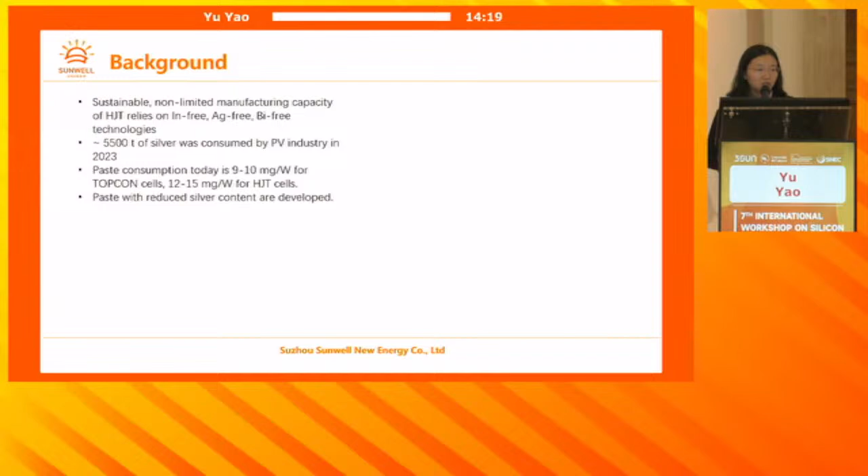I'm going to present our work at Sunwell, done jointly with Tongwei Solar, on copper plating for heterojunction solar cells. Last year in the same workshop organized by Huasun, we presented that for sustainable, non-limited manufacturing capacity of heterojunction, we need to achieve silver-free, indium-free, and bismuth-free schemes.

Today we are able to say that we have a solution ready, industrial scale, for silver-free. You can see from this Bloomberg survey that there are 5,500 tons of silver used by the PV industry last year. Last year they were also claiming that for different technologies, this amount of silver is needed. And we see from last year till now, the industry has done a lot of work to reduce that.

Nowadays it's 9 to 10 milligrams per watt for TOPCon and 12 to 15 milligrams per watt for heterojunction cells. These are in terms of paste. And we know that there are pastes with reduced silver content, so we are doing better than the figures in the Bloomberg report.

However, with low silver content metallization, it's typically like this silver-coated copper paste with ball-shaped copper particles, 1 to 4 microns in diameter, and a 50 to 100 nanometer thick coating.

We know from the literature that when putting a stack of silver and tin on top of copper, both tin and copper will diffuse towards the silver, and especially the copper diffuses through the grain boundary of the silver and leaves behind voids.

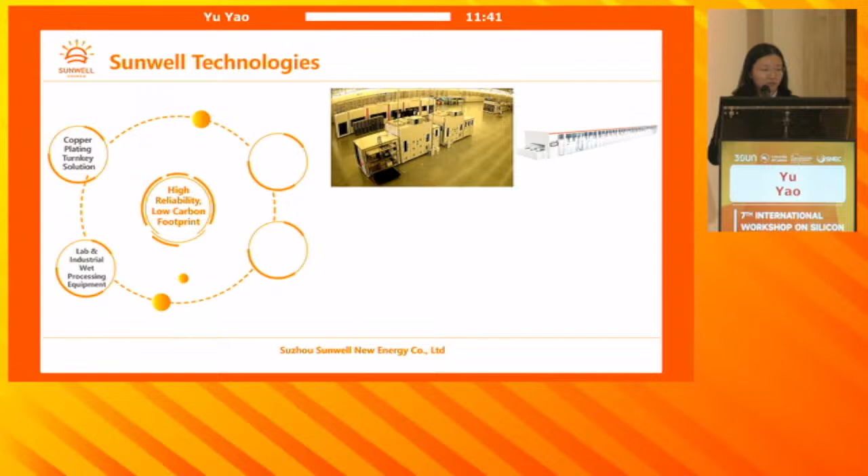We have also had some delivery of multi-gigawatt scale TOPCon wet processing equipment. It's on the customer side in production.

For the copper turnkey solution, we have developed some of the necessary materials, resists, and chemical additives by ourselves. We also have a small portion of our business in BIPV tiles.

Some of you might be familiar with this location, a picture I took in Neuchâtel a few days ago. This is the building where I believe many people working for Roth & Rau, Meyer Burger, and CSEM have done their PhD, and we are proud to say the roof of the building is now 100% covered by Sunwell tiles.

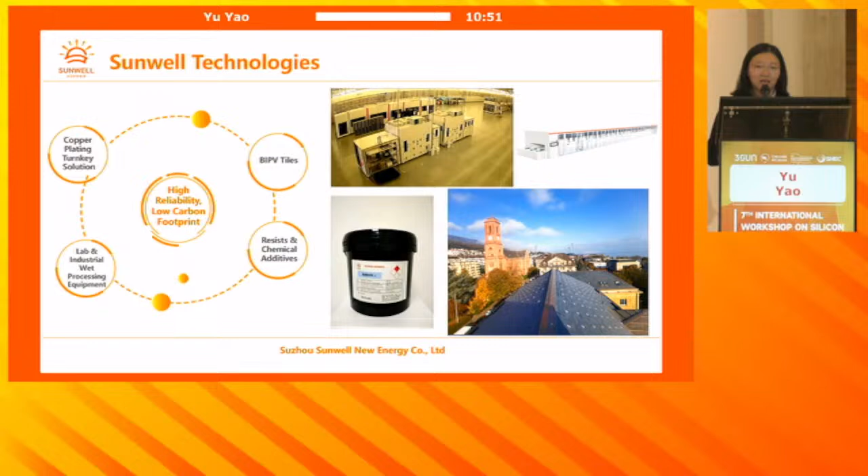Going back to the copper plating turnkey solution for heterojunction cells, our process starts with the seed layer on both sides.

We have developed the equipment, process, and materials necessary for coating the seed layer on both sides, and doing light exposure to separate where the openings and masks should be, with a wet chemistry inline machine for making the openings, and edge protection equipment and material to protect the edges. Then we do the plating and finish with resist removal, etch back, and surface finish.

So for the pattern definition, we actually released the first lab version tool in 2021. It's based on laser direct imaging technique. Basically there's a DMD chip that flips on and off and defines where the openings should be, where the pattern, where the mask area should be.

So it's fast in implementing new metallization patterns. You can basically draw a CAD and put it in the software, and the chip will do the job. But it's limited with a printing speed up to 160 millimeters a second, and it's using laser, so it's 405 nanometer wavelength.

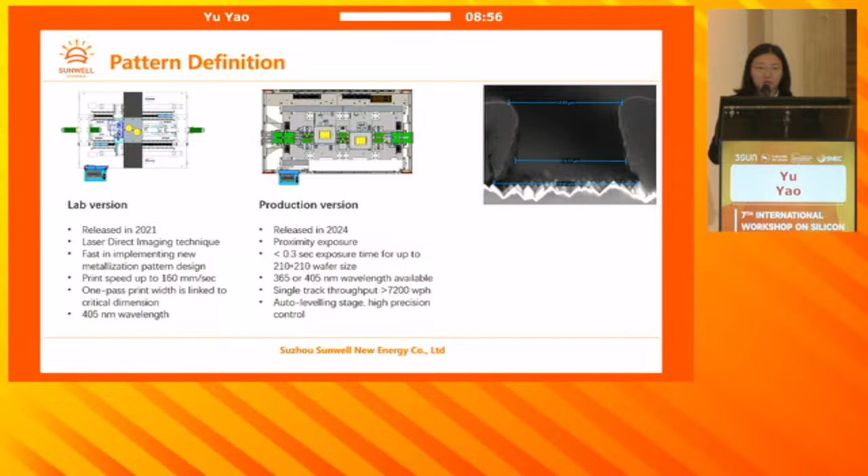For the edge protection, it's necessary to achieve good reliability, because basically all the conductive surfaces in contact with electrolyte, if it's not meant to be your metallization patterned area, should be protected. It also helps to keep moisture, metal, and other ions away from leaking into thin films and silicon substrates. So the edges and surfaces have to be protected.

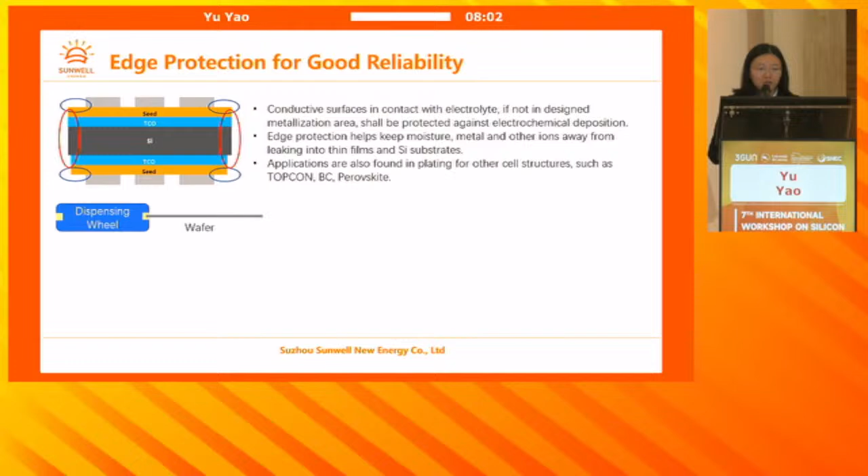Our method is basically we have this dispensing wheel, and the liquid resist goes from the center, dispenses to the edges. The dispensing wheel, any part of it, will never touch the wafer. It's only the resist material touching the wafer.

The resist can be heat cured or UV cured. We have both types of resists available, and the viscosity can be in the range of 200 to 10,000 CPS.

And this actually found applications not only for heterojunction cell plating, but also for TOPCon, back contact, and perovskite. For TOPCon, which was a bit of a surprise to us, when people were doing larger batches and had to involve cassettes in transferring the wafers, they realized that in some cases the edges of the TOPCon cells can clash with the cassettes, and that's where exposed conductive surfaces can be.

So actually, it's also necessary to protect the edges. Our method, you can see at the left, which is quite an extreme case, because this wafer is laser scribed and snapped, so the edge is not regular at all, and we can still protect the edge without cracking the wafer.

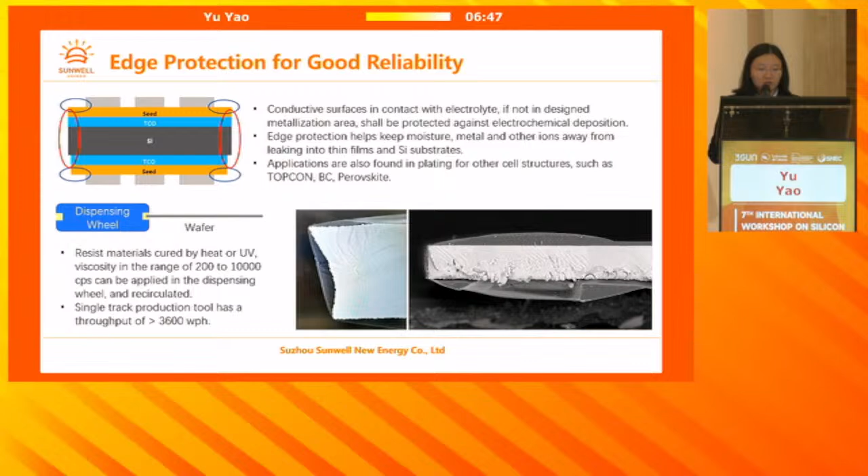So plating for good reliability, in our point of view, has 2 key questions. First is how to make good electrical contact to wafers. It needs to have a tight electrical contact to make sure that it's ohmic contact, but it also has to be soft in a sense that it doesn't damage the pyramids.

We presented also last year that with a hard contact, like small pins, even with 0.3 Newton of force, you will find some tips of the pyramids being damaged. The risk is that usually these are the areas where there's plated metal, so it's not active under electroluminescence or photoluminescence—you're not going to see metal covering the pyramids, but you might see problems during reliability testing.

So that's one of the key problems we solved in our production line. And the second key question is how to make a good copper diffusion barrier.

Here we are lucky with heterojunction cell structure because we have the ITO itself, which is naturally a good enough barrier. In terms of corrosion resistance, different TCOs also behave differently. As we said before, we should move towards a direction with reduced amount of indium or even indium-free. So this will also be our work in the future.

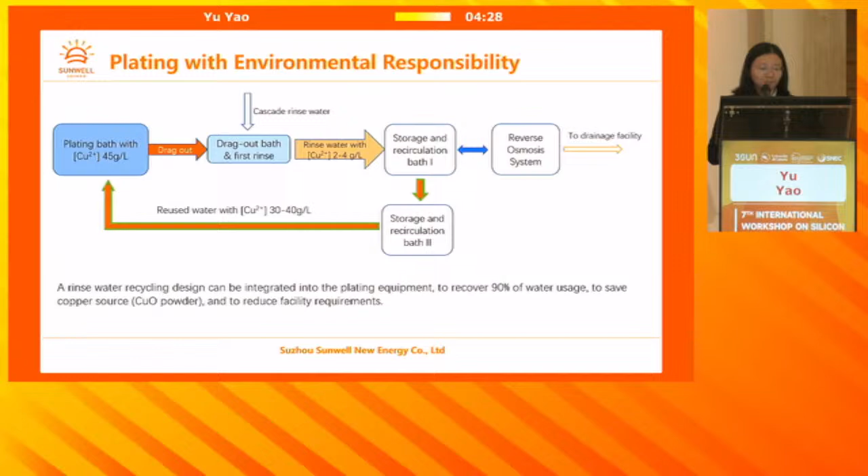In terms of cost effectiveness, there's an important question, which is the footprint of the plating equipment. With our method, we have done two options: one is horizontal plating and one is vertical. The vertical one has multi-lane, so you can assume it's like multiple lanes of cells but placed vertically. By our design and calculation to optimize the operation area and maintenance area, it's actually more economical with a vertical design. And here, the copper oxide powder is of course the cost driver.

With the plating technology, it is not sensitive to the laydown of the metal at all. Therefore, whatever the module interconnection technology is, you can feel free to put zero bus bar, SMBB, this kind of design, without worrying too much about how much metal or paste is used. So it's not sensitive.

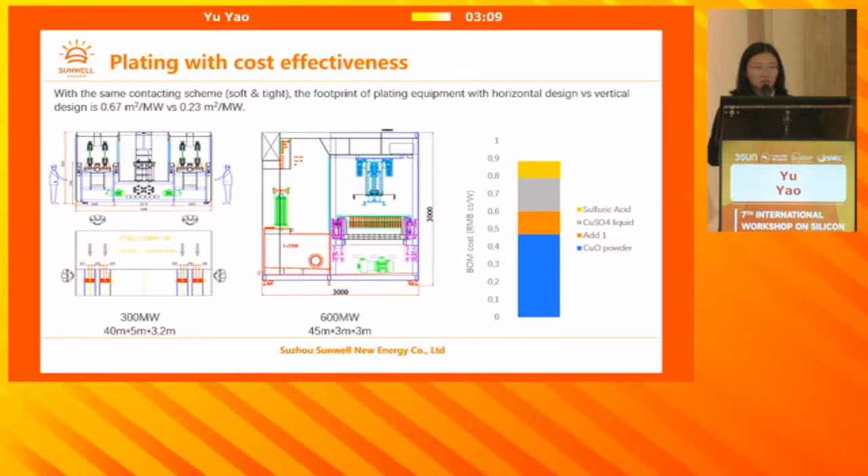Going to the resist removal and etch back, it's basically a polyacrylate resist, so it can be very easily removed just by diluted sodium hydroxide. And the copper seed layer we can fast etch using sulfuric acid with hydrogen peroxide.

We have developed an additive to improve the bath lifetime, which also acts as a stabilizer for the hydrogen peroxide, so we can reduce its consumption. The tool we have on the customer side is already running at more than 15,000 wafers per hour.

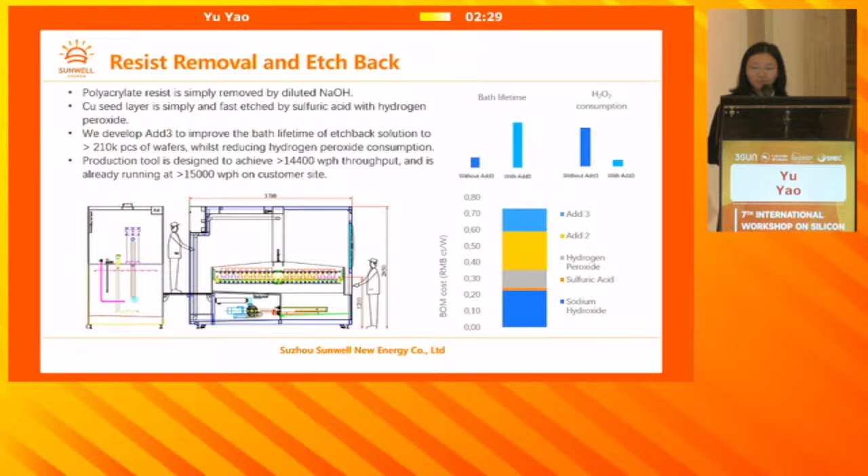Now we are at a level where the efficiency today is 25.55 at small scale, achieved by using almost full area ITO. The backside is not the standard pocket edge exclusion, and thereby we can increase the current to more than 40.4 milliamp per centimeter square. We also have a clear roadmap to achieve more than 755 watt peak in production, which will translate to 24.4% module efficiency.

So with that, I conclude the talk. We did almost 3 years of joint development with Tongwei Solar. Now we are ready with a gigawatt scale plating line to deliver heterojunction silver-free modules. The BOM cost, as shown before, altogether is around euro 0.5 cent per watt peak at current level.

All the additives, in our point of view, have more cost down potential compared to other materials. And the module power, I have covered it.

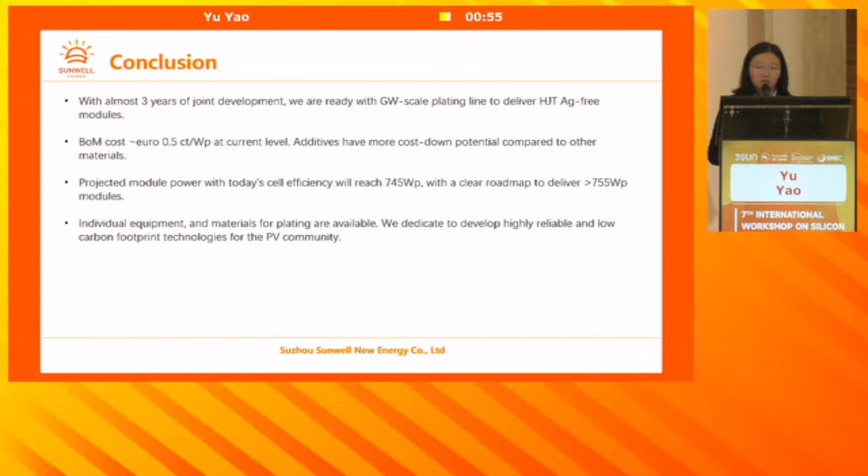The equipment and materials are separately available for any of you who might be interested in testing or jointly developing a process according to your needs. We will continue our work to develop reliable and low carbon footprint technologies. And with that, I thank you for your attention.

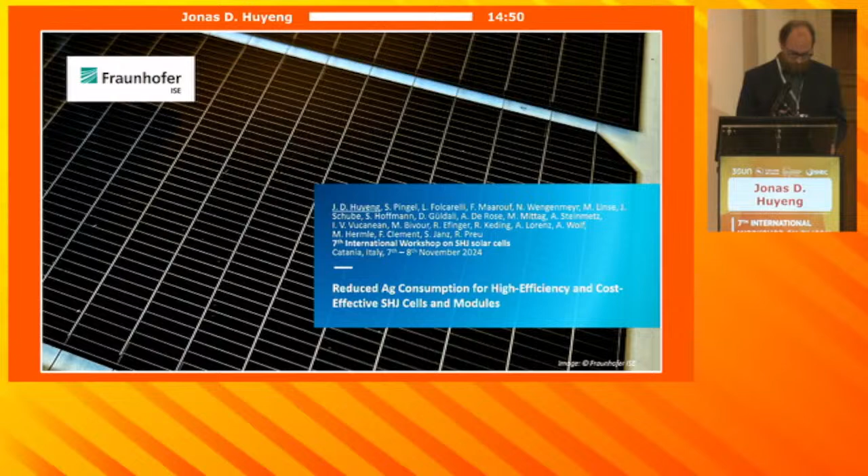Thank you very much for the kind introduction, Olindo, and hello to everyone. I'm here today on behalf of Fraunhofer ISE, and as you can see, a long list of colleagues have been involved in this work. Similar to the previous speaker, I would like to address the silver consumption for the heterojunction technology. But first, let me say that I'm very happy to be here because at Fraunhofer ISE we believe in collaboration, of course with our academic partners and all the partners along the value chain.

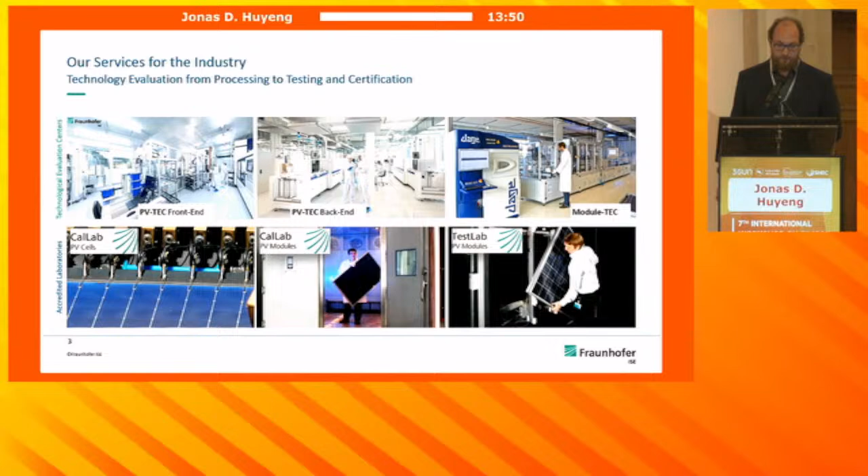In the accredited laboratories. Talking about the PV tech baseline, we have been also developing the heterojunction, bringing it up to the same learning rate of 0.5% absolute in our laboratories, and here are some selected results.

Let me take the opportunity to mention that all the equipment that we're using is coming from the collaboration with the European industry, so we have all European equipment in our processes.

We are sharing the baseline infrastructure with the TOPCon baseline, except of course for the specific PECVD and PVD tools that we need for the heterojunction.

We've been developing all these results for our own in-house processing, scaling up from M0 to M6, and there's also further explorations going on, like thinner wafers or nanocrystalline silicon layers.

We're also using the silicon heterojunction as a baseline for our bottom cell developments for perovskite and silicon tandems. I will show you shortly some results at the end. And we have also some calibrated results on the bottom.

So the first result here is a calibrated result on a gold chuck. All the other ones are on a black chuck, so there's a gain from the short circuit current. And then, of course, we also know we can optimize this with additional anti-reflective coatings to go beyond 24%.

But we don't limit ourselves to only doing our own cell processing. We're also working with industrial materials, especially for the process development in the back end of line processing, so light soaking, edge passivation, or metallization, as is the topic of this presentation.

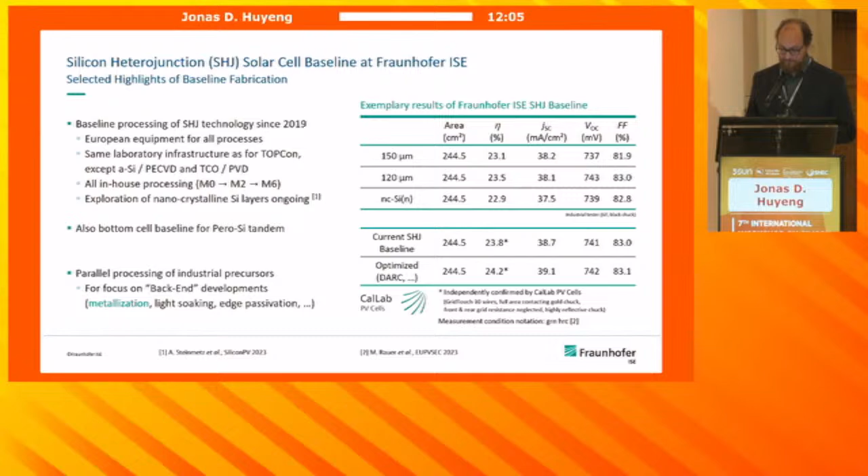First of all, the drop-in replacement for the current state-of-the-art silver technology, as you've heard a lot already today, is silver-coated copper particles. We did an extensive screening of different commercial opportunities that you can get from different manufacturers. I don't want to walk through all of them, just maybe some key findings from this.

If you want to know more details about this, I invite you to talk to me or check out our recent publication from my scientist Sebastian Pingel from the Metallization Interconnection Workshop, just published.

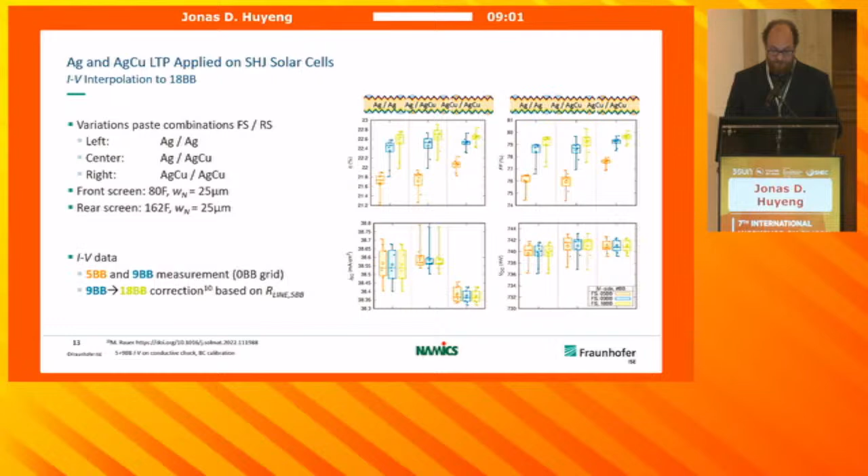So what are the core findings here? We can see there's a prominent drop in the JSC when we put the silver copper paste on the front side, because we have wider spreading of these pastes due to printing, even using the same screens, so they're not fully optimized. Also, there's a higher laydown, so the fill factor is increased because the line resistance for these fingers is lower.

When you increase the number of busbars on your cell, this effect is less important. In terms of silver reduction, we can convert this all to milligrams per watt. While there have been some challenges for these groups, we can already see that silver copper on both sides brings us halfway to the 5 milligrams per watt target. If we can optimize this further, going into fine line printing with these materials, there's more potential.

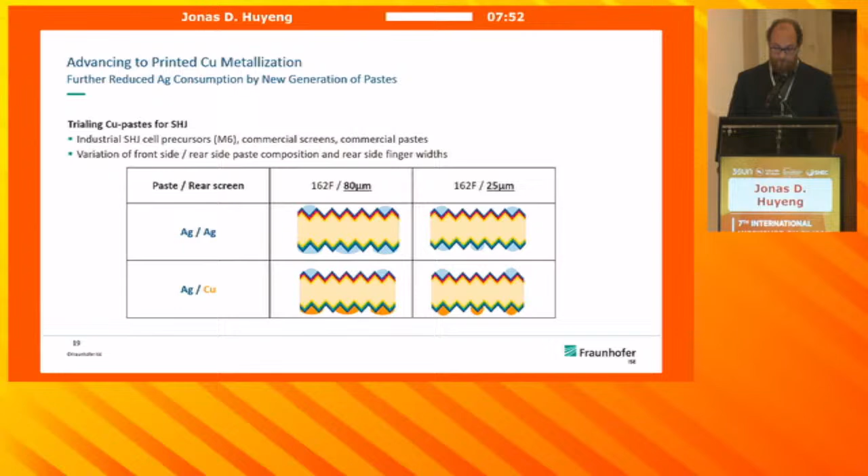We would like to go the full way, replacing with fully copper material, at least testing where we are with this technology. So here's a similar experiment. We have a reference group with both sides silver, and then two different screen openings: the first group has an 80 micron opening on the rear side, the other 25 micron. The front side is the same for all groups.

If you look at the IV data, just in terms of efficiency for simplicity, you can see that for silver it doesn't really matter if you print with 80 or 25 microns - this is already a really good optimized grid. But if you look at the copper material in this study, there's a challenge for the material to pass through the 25 micron opening, so again there's a challenge in printability that needs to be addressed.

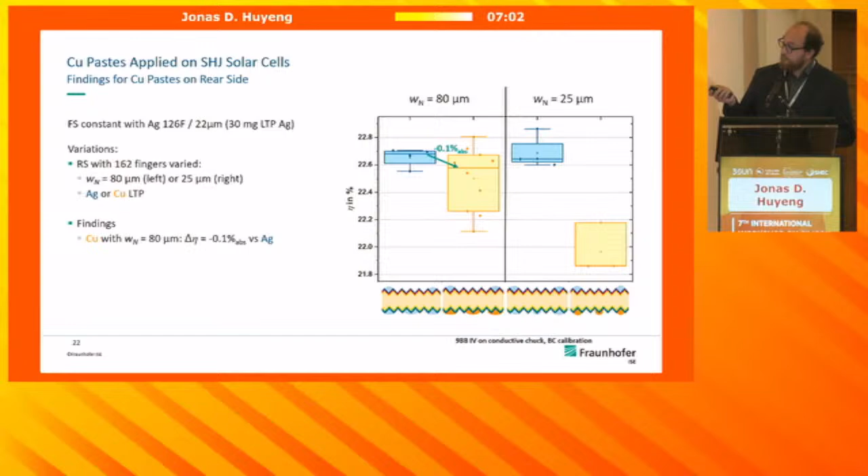In terms of efficiency drops, there's a slight efficiency drop for the wider grid lines and a larger drop for the smaller grid lines. It's not only the line resistance - we've also noticed there's an increased contact resistivity for this material, so there needs to be more work put into this.

The good news is that while there's still room for optimization, the silver consumption, considering fully rear-side copper metallization, is already in the target range we want to go to. Depending on what efficiency you're reaching, the numbers change a little because you're changing the denominator, but you're already below 5 milligrams per watt.

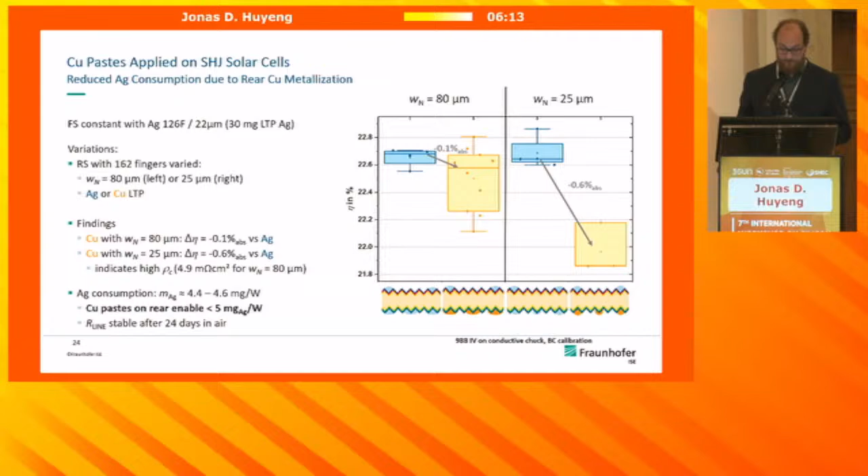The next question is, what about the reliability? These are some quite fresh results - we haven't been able to do all the long-term testing, but at least the line resistivity we've been monitoring for about a month now has been quite stable.

Let me take one to two minutes to think about the module level and the silver consumption that we have on the module level.

Basically, there's different parts where silver can be consumed: the string interconnection, the cell interconnection. Typically you would want to do the string interconnection with a silver-free interconnection because it's not that important. But if you're using another solder here, this can also contain silver. And if you're going for ECA, the conductive particles are silver. We're leaving this out for another day of discussion.

Here we want to focus on low temperature soldering with tin bismuth silver alloy. If you sum all these wires up, and because people like putting more wires on their cells, you can see you're already entering a range of 300 to 400 milligrams per M10 module. You can deduct about 10% if you're clever enough to do your string interconnection not with a silver-containing solder, but this is already some silver consumption that you have.

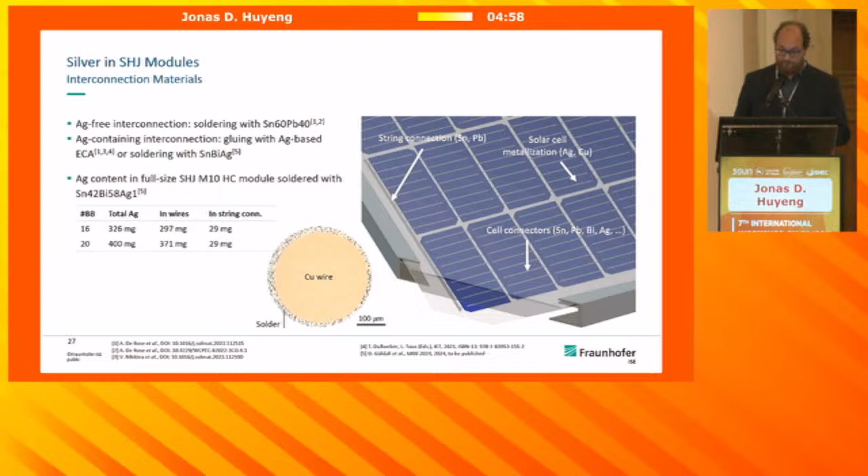How does it compare to the metallization part? Of course, the metallization part is still very dominating. This is a logarithmic scale, so there's a lot more in the busbar and finger metallization.

Of course, it depends on what type of technology or source you're looking at, but it's only one order of magnitude below, so if you're really decreasing the metallization, it makes sense to consider this part of the consumption.

Briefly showing the cost breakdown on module level. The very high cost breakdown part is in the material consumption. Here the wires are about 8% of the overall cost. The good thing is it's not only the coating that makes up this, but also the rest of the wires, which is more complicated to make.

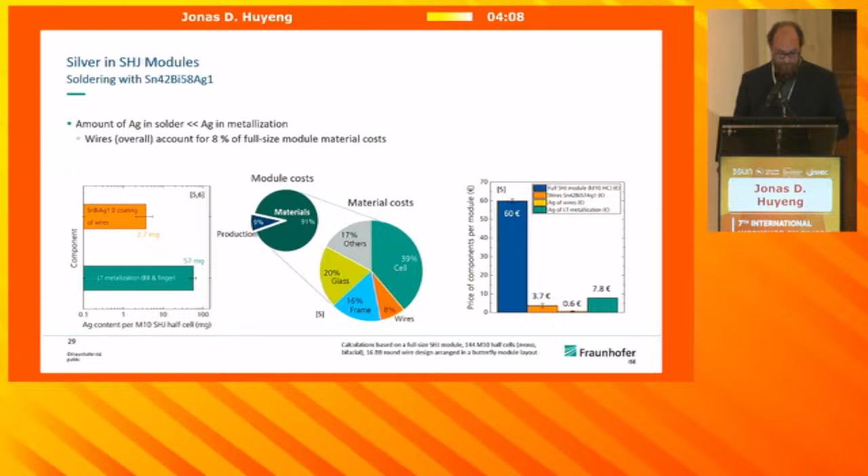And then I want to spend the next 2 minutes, as I said in the beginning, talking about perovskite silicon tandem, because it's the next generation, but it brings very similar problems. I have the feeling that at the moment people are more focused on other problems with this type of technology, like stability. But yeah, there are other things coming up.

For example, the indium usage that we have in the TCOs. I think for now people are happy to use indium in their TCOs to get stable efficiencies, but it will be a challenge if you really want to scale up to terawatt production level.

So the current state at our laboratories on perovskite on silicon tandem cells: we're focusing on the hybrid route where we're using the same size of texture as we use for the industrial silicon heterojunction cells. And with this, we had a recent result of breaching 30%, at 31.6% efficiency. This is still a small cell, so of course we want to scale this up.

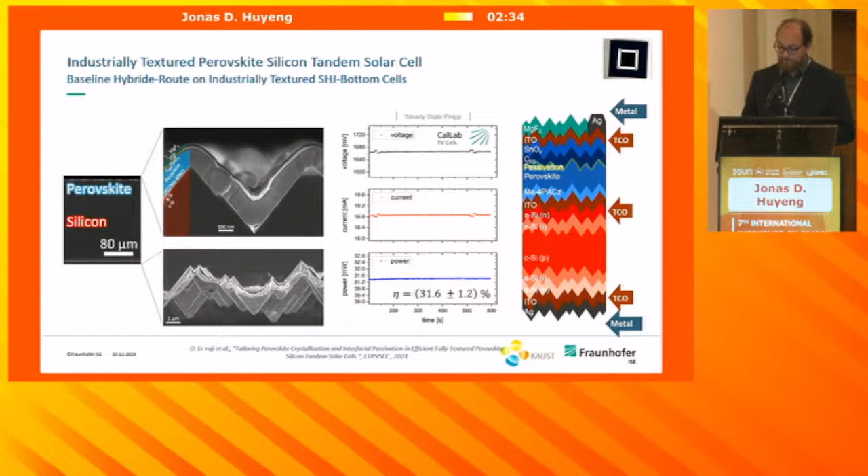One step in this is the TCO. In the first part we have the laboratory tool for small scale, and we have now been able to get very good results also with the inline capable tool, and we'll continue working on this and other things.

One more brief glance about silver consumption. The problem will come up again, as I said, and we have another challenge to face because we have to go to even lower temperatures for the curing. So again, it makes sense to consider what type of materials are there and whether they're compatible with these lower temperatures that we need to maintain the perovskite.

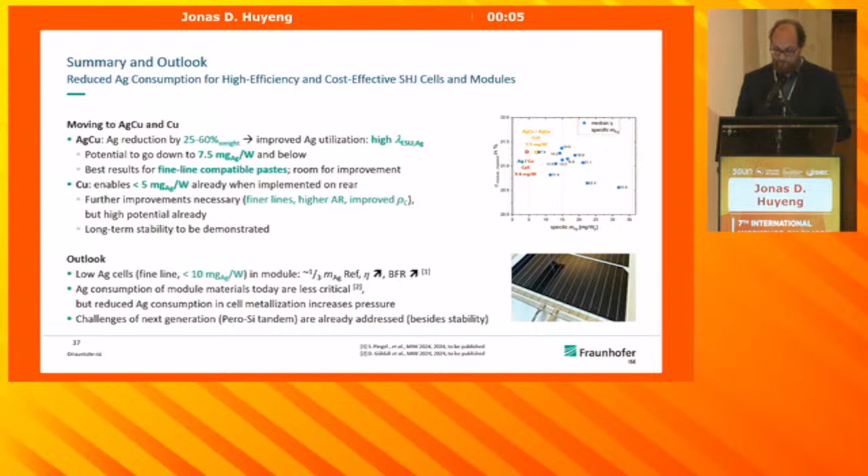Thank you for your presentation. I see already a question there.

Thanks. So regarding the silver copper nanoparticle, the silver covering the copper particles spans a quantity of silver content from 25 to 60%. You don't show if you see some difference depending on the content of the silver. As I know, there's quite a difference. Can you comment on this?

Basically it has the tendency, as you say, so the more you replace the silver in the material, the more you have to rely on the copper. It still depends on how you're making it and what other materials or how you're doing the mixture. There's a lot of know-how for the paste manufacturers, but there's a tendency - there's a limit of how well you can scale down with reducing the silver in there. There's more details in the publication, but today I wanted to give a broad overview. Please feel free to check that out.

Any other question? Maybe just one sentence, Jonas. Any long-term plan for also plating at Fraunhofer?

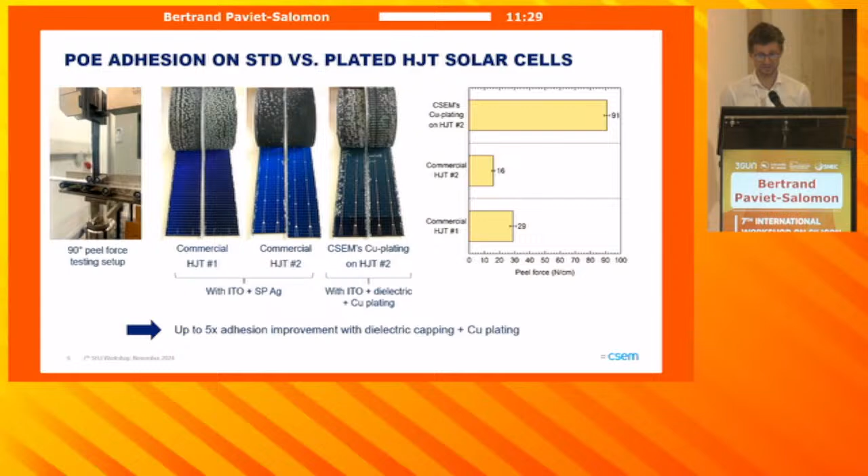Maybe a third point of general comments. Recently some people were challenging with me the reliability of modules with copper-plated devices. I'd like to recall that we have already demonstrated several good results with module stability with plated cells in the past. Long time ago, we already demonstrated glass-glass modules, either with solid ribbons or with SmartWires, which passed several times the IEC norm testing.

More recently, with the process I'm presenting today, we reached full stability for TC and PTC for glass-glass modules with smart wire and no edge sealant, with stability up to 2,000 hours of damp heat, which for such a module scheme is quite remarkable. If you want more details, I encourage you to read this recent paper by my colleague Agata Lachowicz, in which she summarizes recent results of stability for plated devices in modules.

This being said, for today, I'd like to focus on recent results we obtained on heterojunction precursors with thin ITO layers. So let's get started.

For those tests, we relied on half M10 industrial precursors obtained from a manufacturer we are in collaboration with. They feature 50 nanometer thick ITO on the front, and then we applied different seed grids on them. We range from standard silver paste with standard openings. We tested some silver-coated copper paste, and even advanced splits with pure copper paste on the back.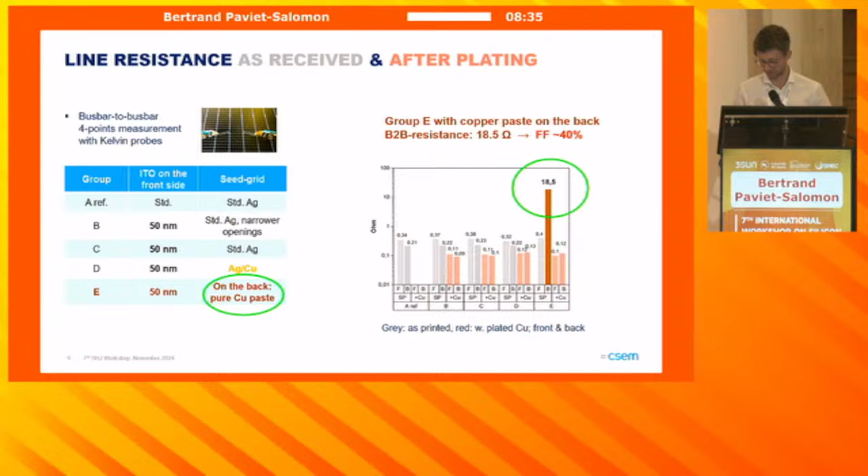As received, those devices feature a lowish JSC because the thin ITO is not a good conductor. But then, as expected, once we completed them with the masking layer and the plating, we fall back on JSC, which is perfectly on par with the reference featuring full ITO and full silver.

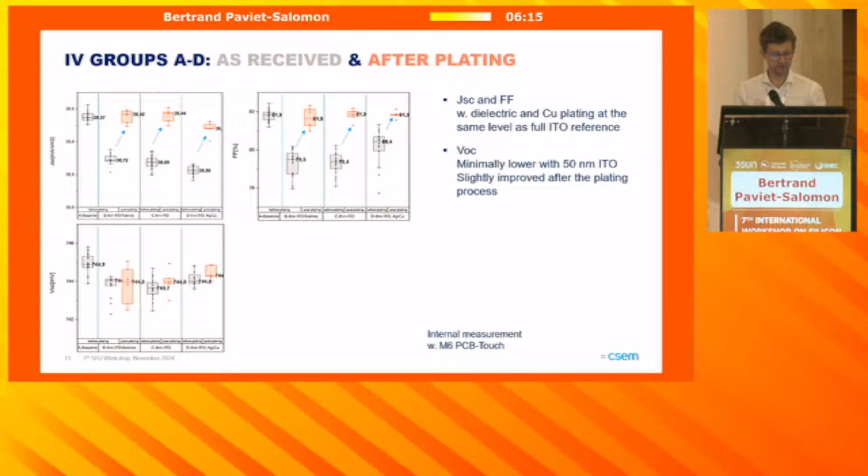VOC-wise, one interesting point is that we observe already in the as-received state a 1 to 2 millivolt VOC penalty for the thin ITO. We ascribe that to a non-optimal alignment of the band with this thin ITO. But what's interesting is that this VOC difference doesn't get bigger after plating, and sometimes is even partly compensated by the process.

So overall, efficiency-wise, all those groups with plating perform very similar to the reference, which was, I recall, a reference with full ITO thickness and full silver printing.

We selected some of the best devices of those groups and sent them to ISFH for certification. The best one came out to be a 24.6% device, which we were, of course, very pleased with.

I promised to also give an explanation on this group E samples featuring pure copper paste on the back. As I said, in the as-received state, they feature very low fill factor because this copper grid on the back is not suitable for good transport. But after plating, the fill factor is pushed much higher, close to 78% in that case.

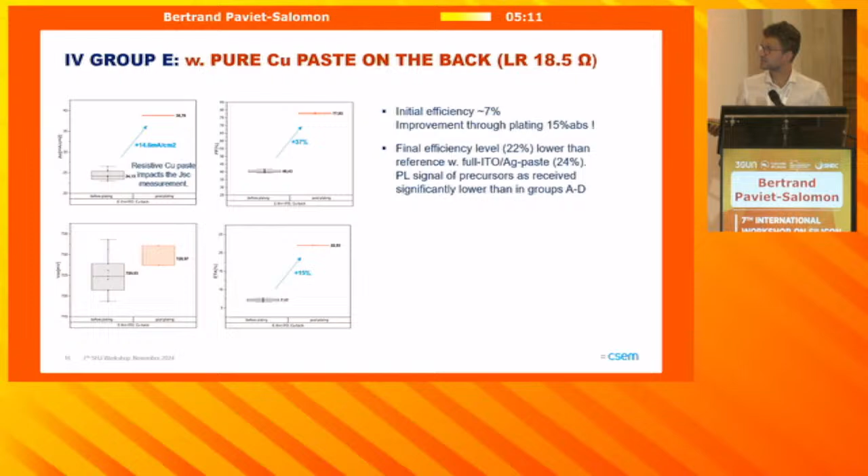So it's very encouraging. I have to say that those devices, in particular, are plagued by unexpectedly low VOC, which was already the case before plating, and which somehow stems from the processing stage, because they were featuring pretty poor PL signals compared to the devices in the other batch. So globally, there should be room for improvement to have a pure copper approach with those devices.

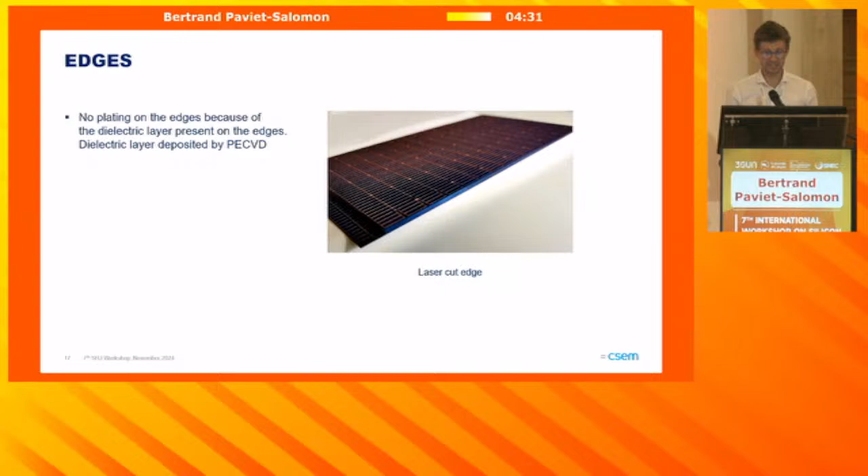The previous speakers mentioned the edges, and I'd like to insist that with our process, because the masking layer is also present on the edges, we do not have any parasitic plating on the edges. So those edges are very well protected by the process, which might also be an advantage in terms of future upscaling and mass production.

We even went one step further into challenging the process with even thinner ITO. In that case, we received half G12 heterojunction precursors with only 30 nanometer ITO at the front. Long story short, after plating, the efficiency was very similar to the reference with the full ITO thickness.

The only caveat is that, surprisingly, the JSC was notably lower than the reference, but we identified that it was because this thin ITO was peculiarly featuring very high parasitic absorption, and so we're working on that with the customer to come back with a thin ITO featuring much more transparency.

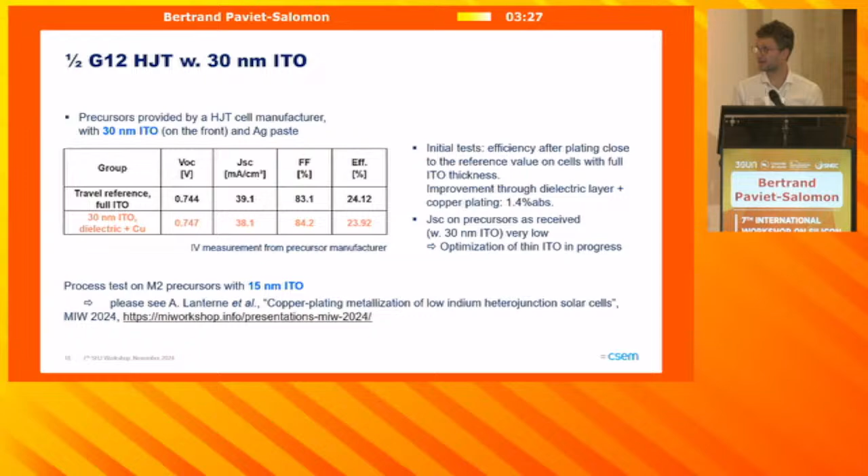And in case you still have not enough with thin ITO, I encourage you to read the poster of our colleagues from CSEM, Adeline Lanterne, who actually applied our process to precursors with 15 nanometer thin ITO. You can access the poster online in the proceedings of the Metallization Workshop.

All right, then let's now conclude with the cost calculation of the process. I'd like first to emphasize that all the data we are using for this cost calculation, we received from a multi-gigawatt Chinese manufacturer. So they represent the current best practices there.

So we are considering three scenarios. The first one is the baseline screen printing process, where we use 50% silver content paste and full ITO thickness at the front and at the back. And we benchmarked it against two plating options. Option one with a 30% silver content paste and a reduced thickness of ITO at the front and at the back. And the second option, a bit more aggressive, where we also replace the ITO at the back for an indium-free alternative.

So, on the additional cost side for the plating, most of the costs stem from the fact that you have to add a tool for the masking layer and the plating tool, plus the chemicals and gases to be supplied to those.

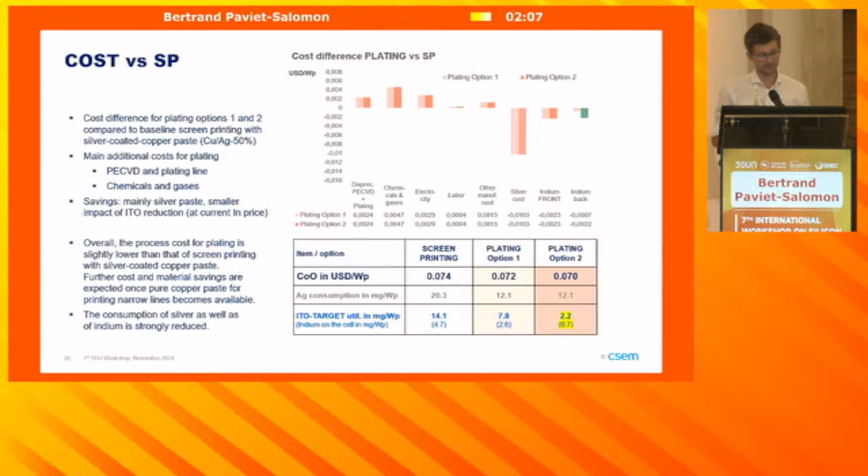But conversely, on the saving side, most of the savings come through the reduction of silver paste, with the reduction in ITO thickness coming as a second order effect. Altogether, the process cost for our plating process was found to be lower than the reference.

We expect this difference to be even greater once even cheaper copper paste becomes available on the market. And at the end of the day, with the approach we propose, you can reduce indium consumption below 1 milligram per watt peak at cell level, which is also very important for the future upscaling of heterojunction as a main technology.

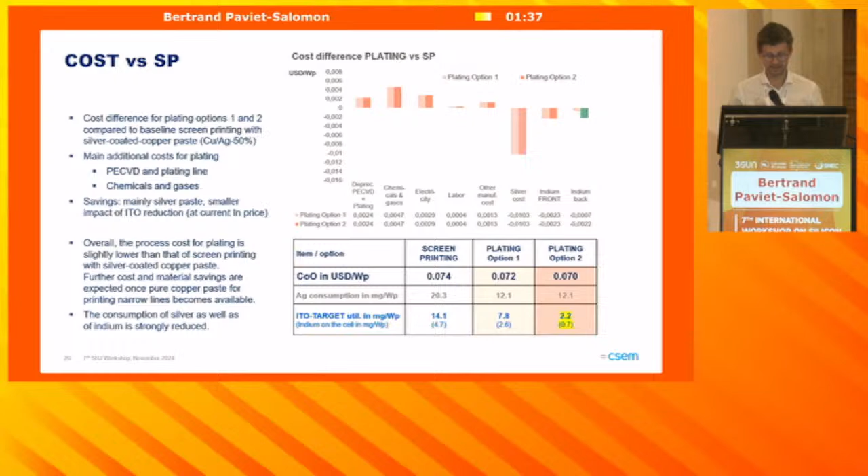So now it's time for conclusion. I hope I convinced you that there are many advantages of our plating process. There are six of them I would like to recap.

First of all, there is no need for additional treatment to protect the edge, and we have no ghost plating there. The round shape of our plated fingers is beneficial for light trapping. We can save indium up to 70% and silver in a very appreciable amount.

Last but not least, our process also proved to improve the adhesion between the encapsulant and the cell, which is good. Also, involving a masking layer might be beneficial to mitigate the UV degradation of those devices. So with that, I'd like to acknowledge the funding agency and thank you for your attention.

Thank you very much.

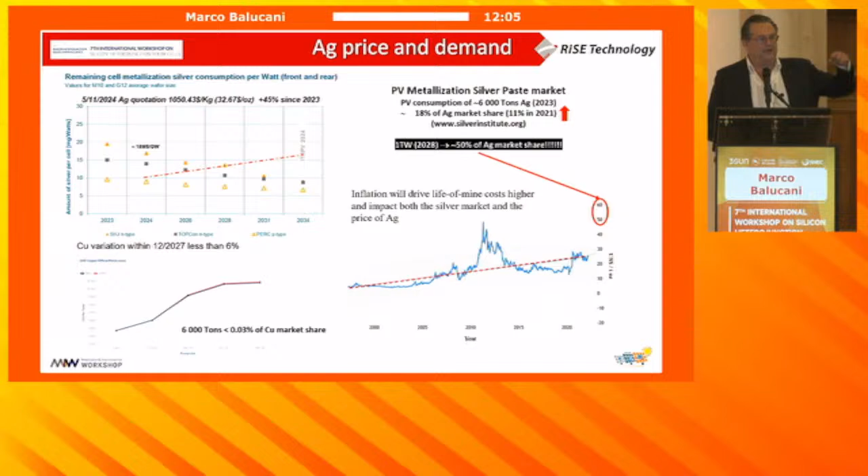The problem is that in 2021, silver, respect to the total market, was only 11%. Today, in 2023, we're becoming 18%. If you see a historical trend of the price of silver, what happens is that if you put the slope of the increase in time against the decreasing quantity of silver, at the end your cost of silver will be more or less the same. That's the issue: if we don't decrease with a faster slope than how the price is increasing.

So it's really a must to move to copper. Moreover, we will have a very low impact on copper because the quantity of copper, the market share, is three orders of magnitude higher respect to silver.

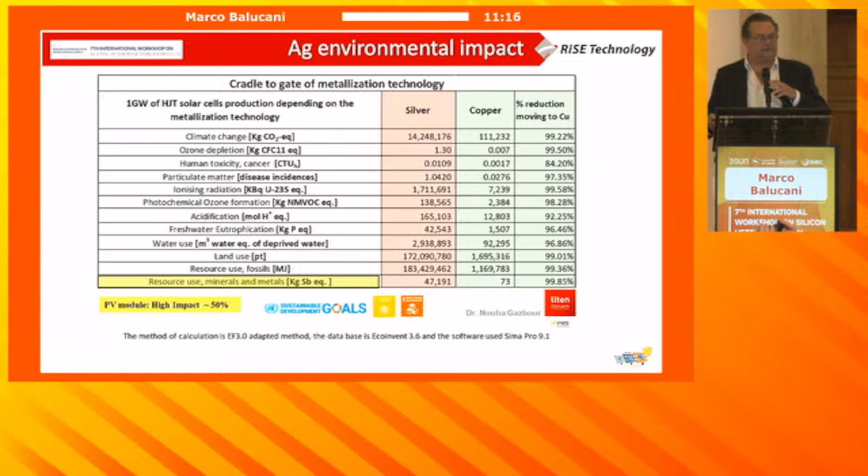The other reason for moving to copper, this was made by Gazbour at INES, is also the environmental impact. Copper cuts it really a lot, more than 90%. If you look at the last point, in yellow, you will see that that is also a high impact for the PV module. So it's very important, if we move to copper, this will decrease quite a lot the environmental impact of the solar cell. So again, taking silver, the international roadmap already shows that they say okay, we will use copper in some way.

Everybody is speaking about silver that is covering copper nanoparticles and so on. But mainly the technology, if you see, will be screen printing, or, as in the next presentation, a variant of screen printing or something like that. But in any case it's screen printing, nothing about plating, except the first presentation. In any case, the prediction is that the market share of plating can be 6% in 2034.

So let me spend a few words on silver-coated copper. That's why I was asking some questions before. You can see they're mainly working with a filling of silver at 20%, 30%, or 50%. We would like to have round balls because the coating is smooth and you have low oil absorption. This means that you can fill quite a lot of material inside.

If the coating has pores or oxidation, that's a problem. But in reality, as proved by ESA, whatever you deposit on top, you will have oxygen passing through grain boundaries. That's what's called the red plaque. In time, if you have oxygen, following the chemical equations, you don't even need water - oxygen alone is enough. You don't need a wet ambient. You will have some red plaque, some oxidation. This doesn't mean it will not work, but you will have an increase in resistivity.

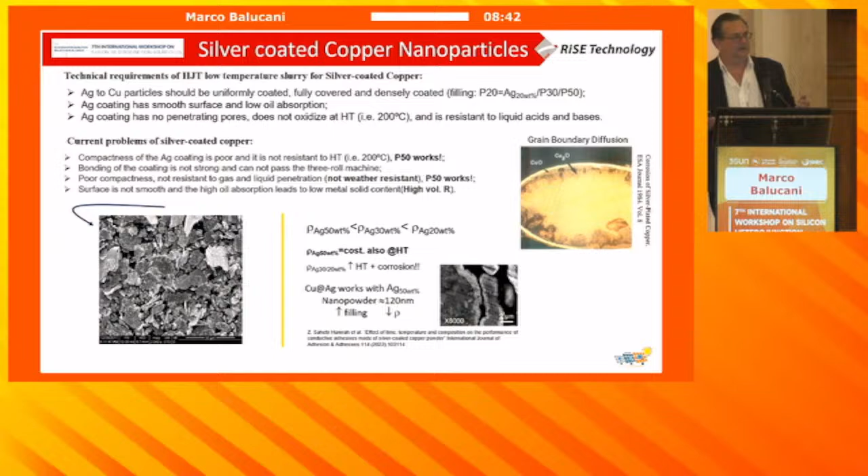So let's look at how we can bring copper to photovoltaic. Regarding copper paste, as the previous Fraunhofer presentation recalled, they're working on it and have some reliability results, saying it can work, but we don't yet have stability. Silver works, but even if you decrease the silver quantity by 50%, the price won't drop proportionally - you'll get roughly a 25% cut in cost. So either way, you're spending money.

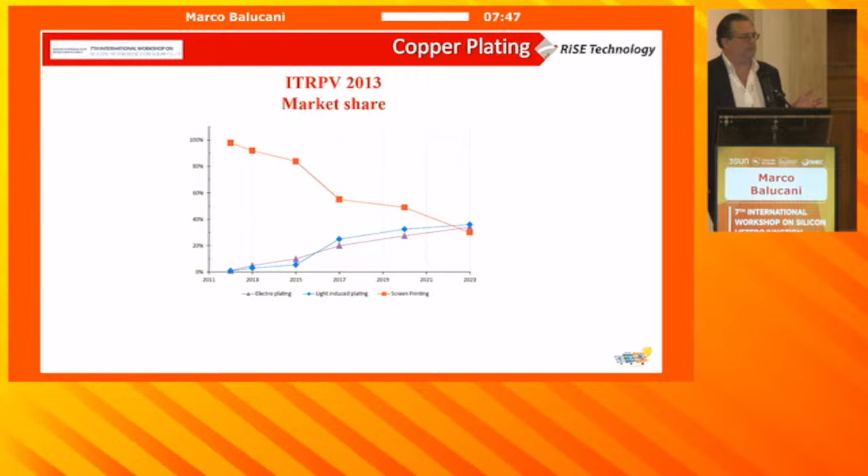So the other option is copper plating. What's going on with copper plating? If we look at the International Technology Roadmap for Photovoltaic from 2013, they predicted plating would cover almost 66% of the market and screen printing only 33%. But in 2024, they forecast copper plating at perhaps only 6% by 2034. So the question is: why? Why does nobody believe plating will take off in the photovoltaic industry?

So the story up to now: plating started in 1805. There was Volta, Galvani, and then Brugnatelli in Pavia made the first gold plating. How? He used a tank with a salt of gold, took a piece, fully immersed it inside the tank, and made the plating. Today, in 2024, what do we do?

So how is plating done up to now? You're using baths, touching the surfaces, or taking the wafer and putting it inside a tank - that's what you're doing. This is the first selective plating I've seen, brush plating. But in any case, you need some mask and so on.

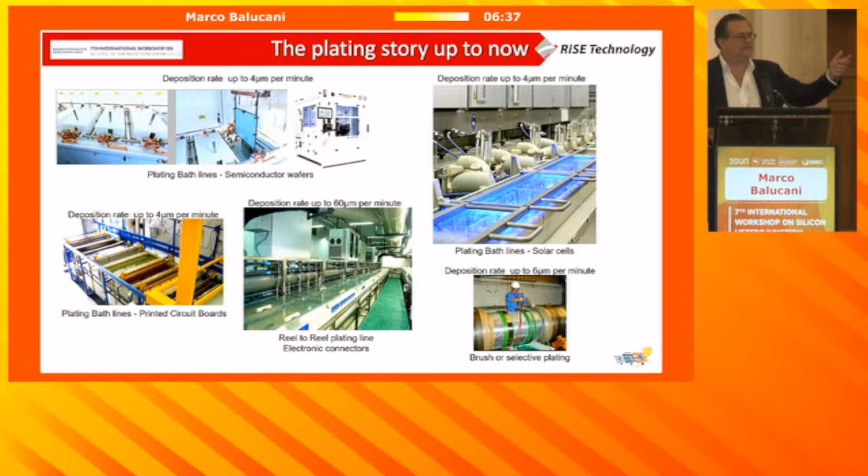Let's look at the plating speed: 4 microns per minute for photovoltaic. To give you an idea, we're speaking about 600 liters for 200 megawatts. The first presentation, the machine Yao presented, was 45 meters for 600 megawatts. Let's ask how many liters of chemistry they have to use - you need a lot of solution.

So which are the issues? Of course you can't put copper directly on silicon, but we know TCO is a good barrier layer. The question is, you can't have pinholes or scratches. Whatever layer you put - silicon, TCO, or otherwise - you need protection because you can have pinholes. Here's a technique for coloring - if the quality of the dielectric or TCO isn't good, you'll get ghost plating, that's for sure. So you have to protect your system.

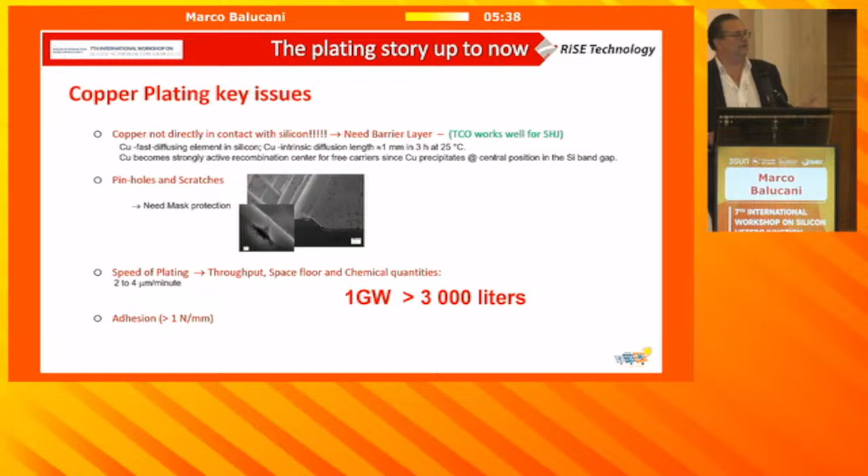The other question is the speed of plating - you need at least 3,000 liters for 1 gigawatt of production. Imagine what that means: a machine that's 45, 50, 60 meters long. So if you have to do 10 gigawatts, what do you do? 30,000 liters or something like that. That's what's creating big problems.

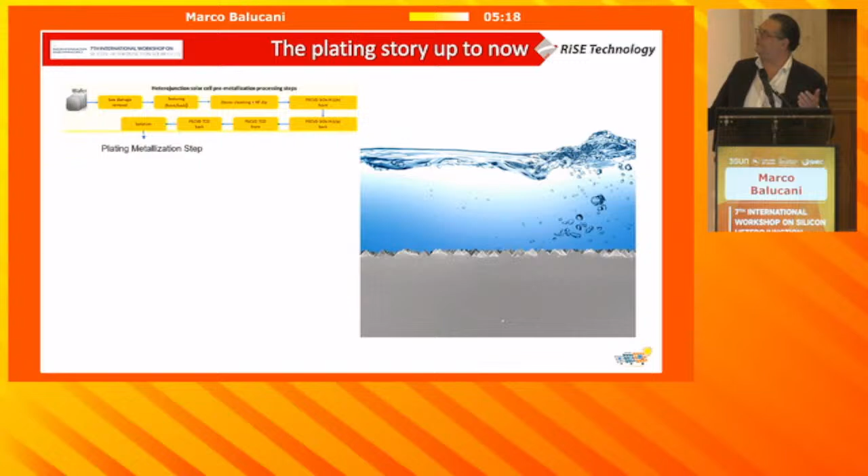If we go through the plating techniques, in any case, the wafer is fully immersed in a solution. So depending on the step, you need to protect something. It can be a seed layer everywhere, like copper, or it can be a dielectric and so on. Then you have to do an opening, like we saw with lithography, seed layer, copper deposition, and then you can remove. In any case, you are consuming a lot of solution and wetting all the wafer, so you need a protective mask that will cost and will cover.

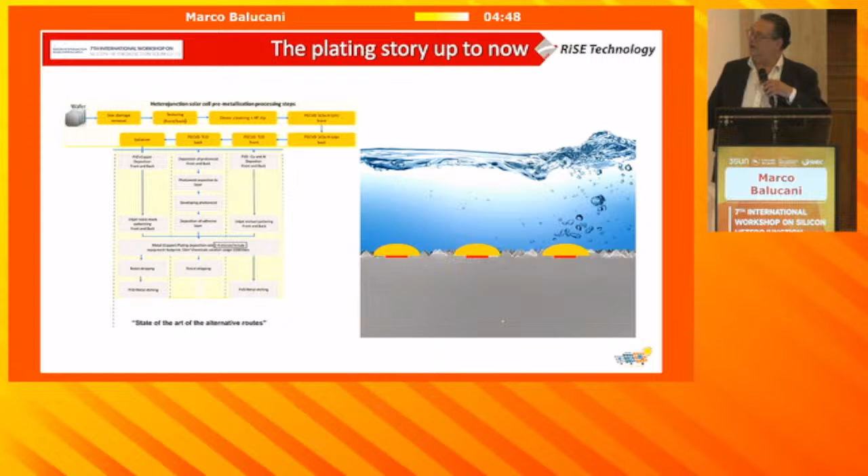So the idea is, can we remove the mask in some way? Can we reduce the quantity of liquids? And can we have some Moses effect that is able to separate the water in somewhere and try to do something like this?

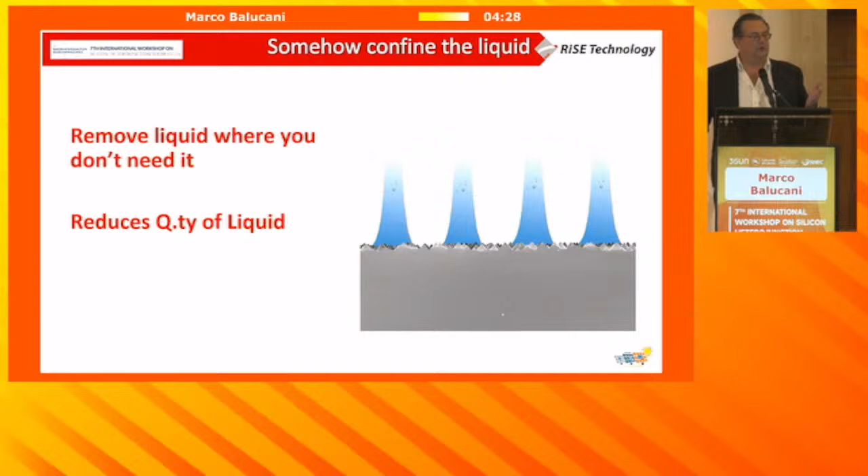So let's say having a confined liquid in some way, so we reduce the quantity of liquid that we need. We can make a seed layer, and when we deposit copper, copper will stay inside the liquid, will not go away because the liquid is there. This means that you are touching the surface only for 4%, imagine the fingers that you have, and then you need quite less quantity of liquid. So that's how we try to do it.

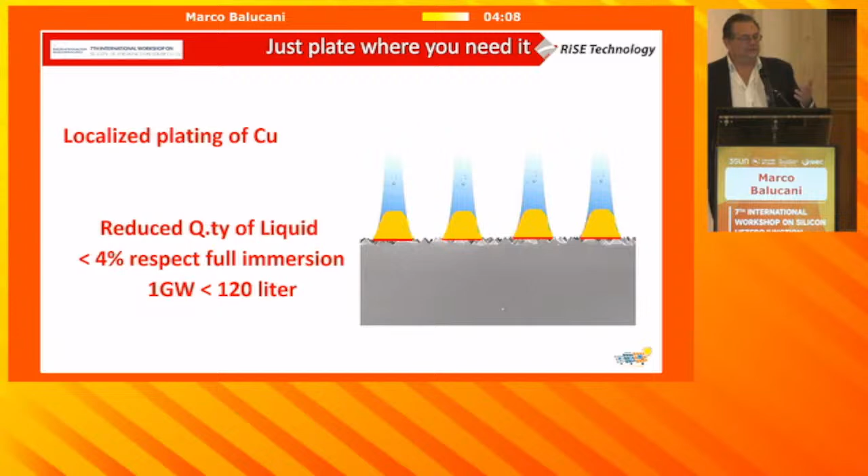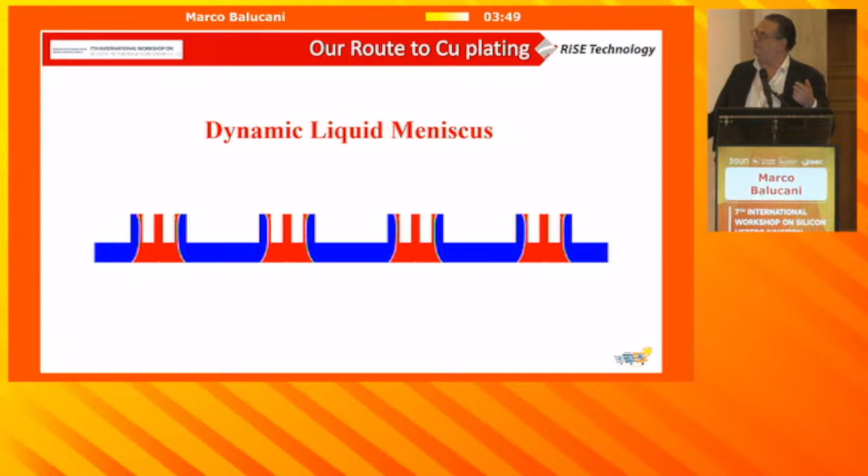So we do what is called a dynamic liquid drop. We confine the liquid, and as soon as a surface will arrive, we form what we call a dynamic liquid meniscus. And each one of these is independent, so imagine, independently, this liquid is like a damper - it will adapt if you have non-uniformities and so on.

So the shape depends even on the current density and so on, but let's say for heterojunction, the steps that we do are: we do an ITO reduction, then we cover with nickel, and then we deposit copper. Here you see, for example, we are testing because this was micron holes that we realized, and then we touch the silicon only when we want.

And this is the philosophy of the equipment: you change the mask like on a stencil printing, the nozzle that you need. You need to build M10, G12, or whatever you want - you change that mask and you can do the plating you want.

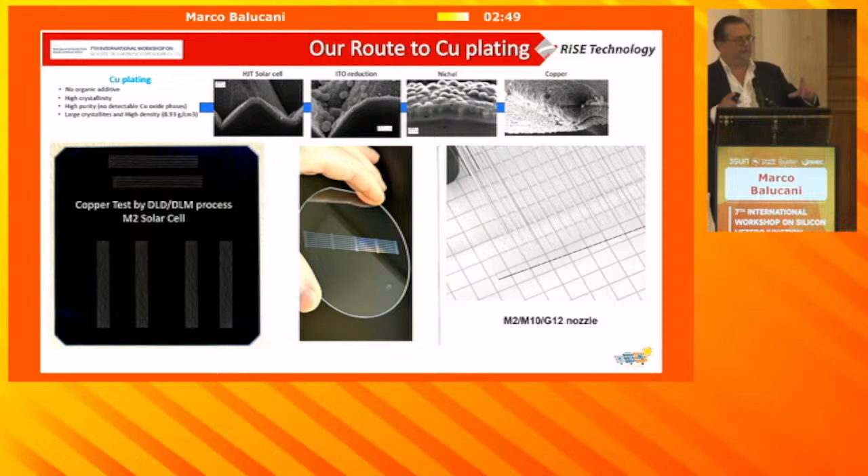So what we measured is, do we damage the silicon when we do reduction of ITO? So we measured lifetime, and we don't have any kind of impact on the passivation layer.

What about the speed of plating? So if you consider the equation - it was proved already some time ago - you have three terms that govern the exchange of the ion. Mainly it depends on the gradient of the concentration, the potential, and then on the fluid speed. So this is fluidodynamics.

Depending on the speed of the liquid that you have, we are positioned more or less here, so we can go very fast. Remember, we can do 1 micron per second, so this means in 10 seconds we put 10 micron, and that's squeezing down the dimension of the machine. And we have very nice quality of copper, the resistivity is very good, and we have less 200 orientation, so this means that even at high current density, there will not be a migration of ions and so on.

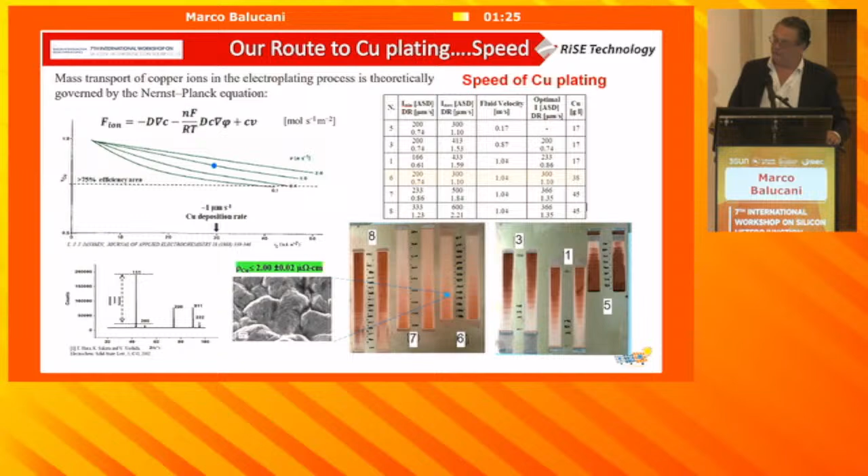And the nice thing is that when we deposit the nickel, we are covering the indium balls, and then we do a simulation of the lamination process at 150 degrees. At 150 degrees, mainly what you are forming is an eutectic.

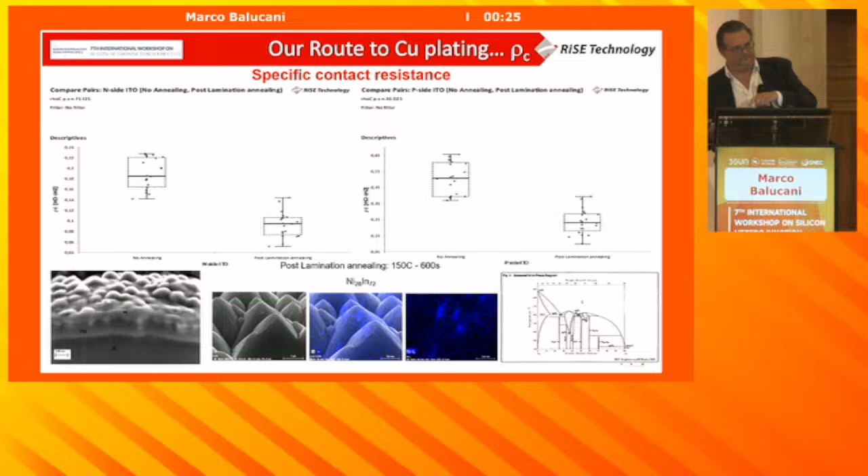This is very nice because it decreases the resistivity, and we see a decrease after the post-lamination specific contact resistance. This is because we form the intermetallic, and that's why you have really good adhesion. When you pull out, you still see ITO, but you also find the nickel because you form the intermetallic.

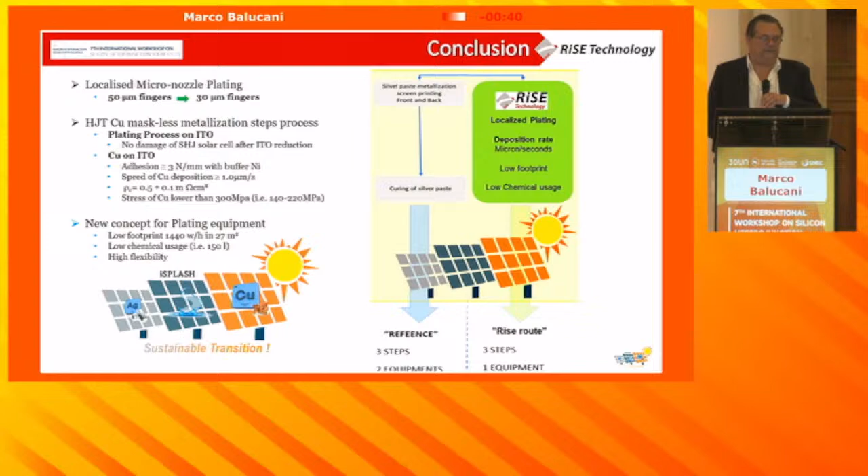To conclude, we believe this is the standard process. We are introducing only one piece of equipment, even better than the silver paste, because with that you need a stencil and an oven. With our technique, we do only plating directly, and that's it - that's the main advantage. We are working with 30 micron fingers, so the equipment will come out with 30 micron fingers, and here you see the process. The floor space is very low, and the quantity of liquid we have to use is very low.

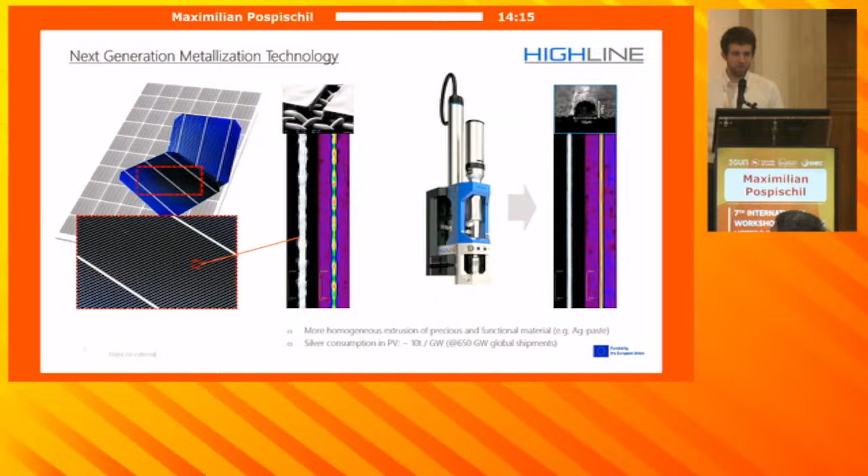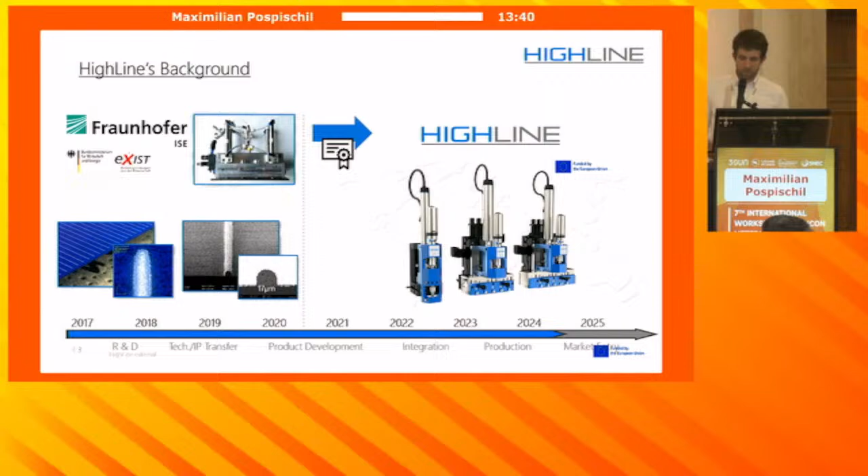So Highline - as you see, the line is high, so that's why the name is Highline. We were founded in 2019 as a spin-off from Fraunhofer ISE in Freiburg, and we have an exclusive contract for all the IP we generated before, and now we want to enter the market. We started with a lot of product development and integration projects, started up our production last year, and now we are at the moment of market entry, planned for next year.

To make it short, I have a video for you - I hope it works, and I'll comment a little bit. So we do micro extrusion, as you see here, with our print heads. It's our core product with a single nozzle, and you will see later a multi-nozzle version. We can do, of course, different shapes, all very homogeneous, with nozzle openings down to 10 microns.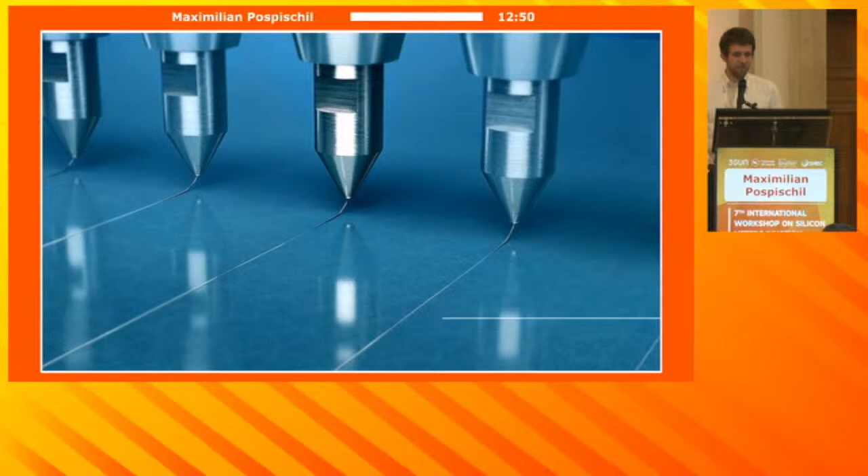And very precise intermittent operation, which is very much the key, because as you know, solar cells are single substrates and not roll to roll. We can do multiple steps, as you saw, and when you scale it, we invented these nozzle rails, and for an industrial product, you need to exchange those nozzle rails every now and then.

And here you see applications, solar cell. This is our new application, hydrogen flow field coating. This is full layer coating, and even on roll-to-roll processes it's possible.

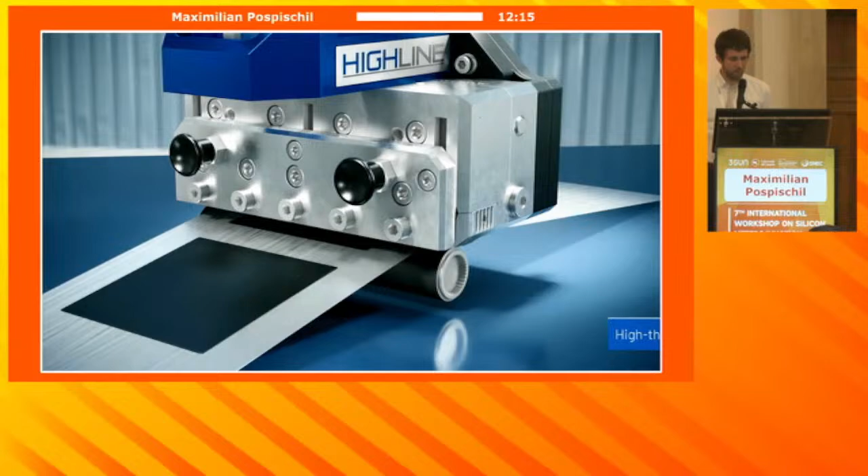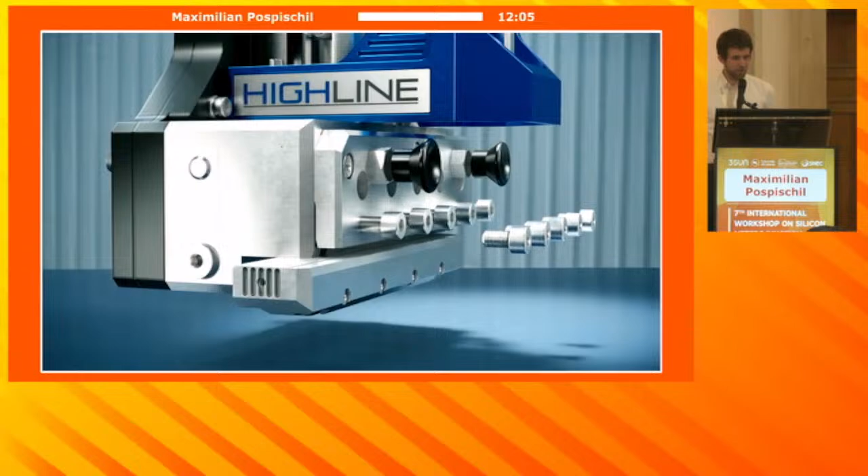So how do we do this? We just exchange the bottom part of our printhead, and then with the new part you can do a different layout. And as we want to be flexible, it's not where we started with one nozzle and went to multi-nozzle. We started with multi-nozzles and went to one nozzle.

That's something new, but the single nozzle is very attractive to some other applications besides PV.

So now you know, fine lines, closed off system. That's very important - the paste is not in contact with the ambient condition, and that's a very cool thing because you can add solvents or use solvents that are volatile. And this is a big difference to screen printing, because imagine you increase the speed of the lines - you also have to increase the length of your dryers.

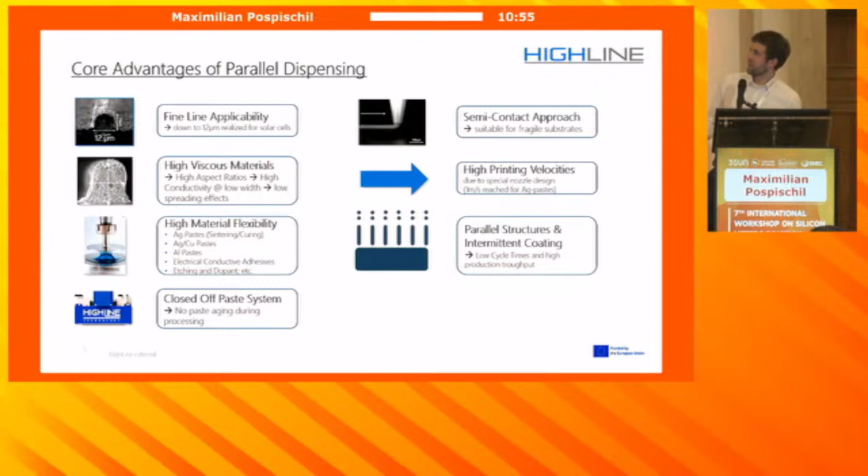Then of course there's no contact anymore, no contact to the wafer. And if you have a contact with the wafer, there's a problem with the machine. So we do any parallel structures, and we can customize the nozzle kit depending on the application.

You need a strong tool around it. And so we found with this topic you can really accelerate the development.

And actually you can always demount the top part, the part in the front, the blue part - you can demount it and put it in the freezer. This is very important for this community, because most of the paste you need to be frozen when stored. And so what we do is we just put the printhead in the freezer, and next day we defrost it.

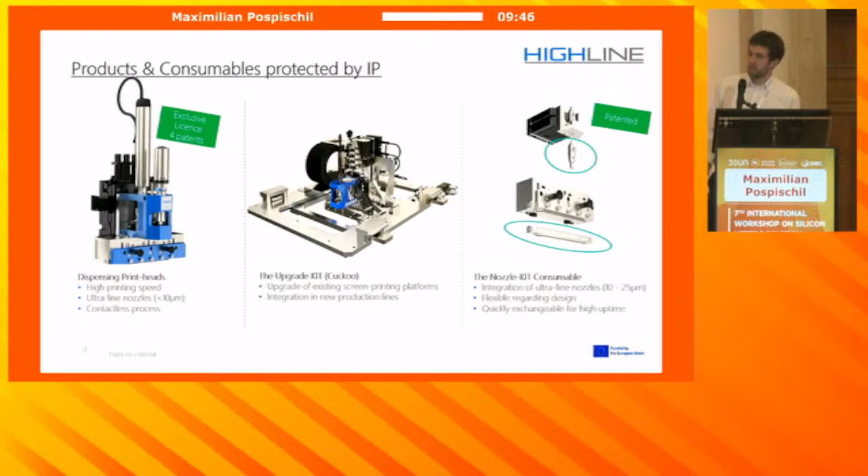And continue working. So we have the printheads, we have the nozzle kits that you can exchange and define the layout with. And then as there's a lot of screen printers around, we developed this upgrade kit, the cuckoo, we said, because like the bird, it puts its eggs into a nest that's already existing, which is the screen printer in this case.

It's a very good tool to develop like this. We found there's a lot of applications in other markets than PV. For PV, this would mean that the speed of our process, which can be very high, is limited to this blade movement, like in screen printing.

So in order to really roll out the full potential, it's better to have different automation solutions. So how do we control those parameters? It's not just like 3 or 4 parameters like in screen printing - we have a lot more options there.

And we developed an AI-based inline process control and analysis system that keeps our process running. And we have really made great progress. Let me show you an example.

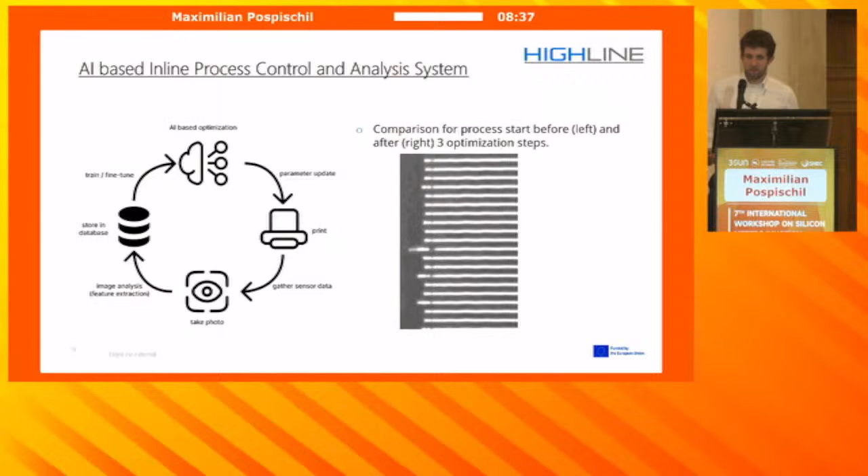When you start and there's something in the front, you need to open the valve and increase the speed at the same time. And then you end up with something like this, maybe in the first place. And then after 3 optimization steps, our AI controls it already like this.

And in the end, even when, let's say, paste viscosity would change, or you have a stop of the line, there's no shear anymore, then you start over again. The AI can control all this, and it makes life much more relaxed for any operator. And in fact, we don't want to have too many operators on a line in a fab, right?

So let's go to solar cells.

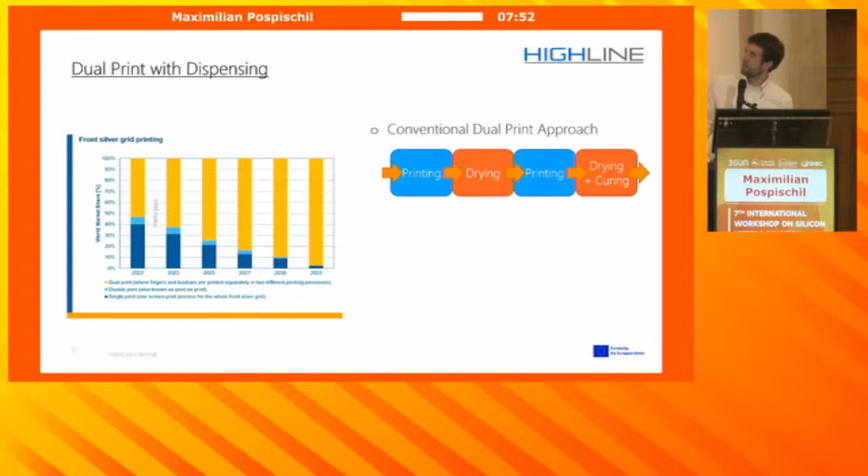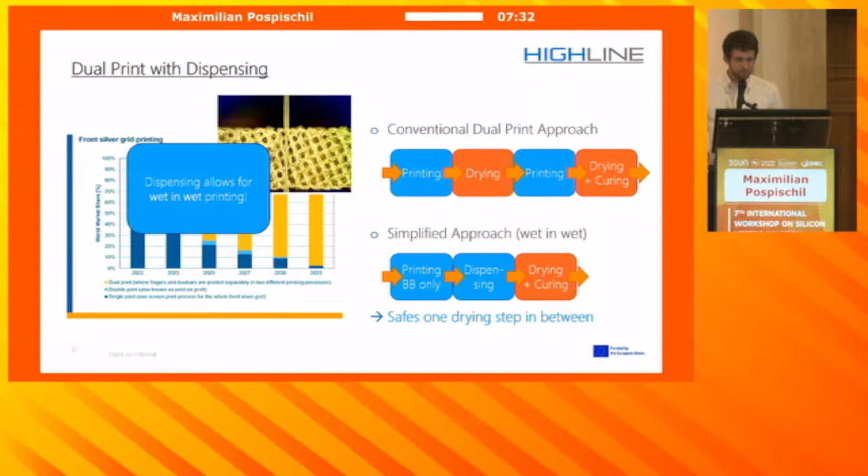When you apply bus bars and fingers and want different paste optimized for different situations, usually you do a dual print, and in screen printing that means there's a drying step in between. We are contactless, so we can do wet-on-wet printing, which saves a drying step. This makes your factory shorter, and your wallet stays more filled when you invest in new technologies.

Let's go to solar cells. We do these fine line contacts, and we have a very strong partner here, Applied Materials, our friends in the north of Italy. They set up a very cool machine that handles all the automation, and we focus on our process, on our printhead.

What we also need is a paste. Now I'll show you how to do smaller lines with larger particles that require larger nozzles. As shown by Katharina, a former PhD student at Fraunhofer ISE, the stretching of the paste works very well with dispensing.

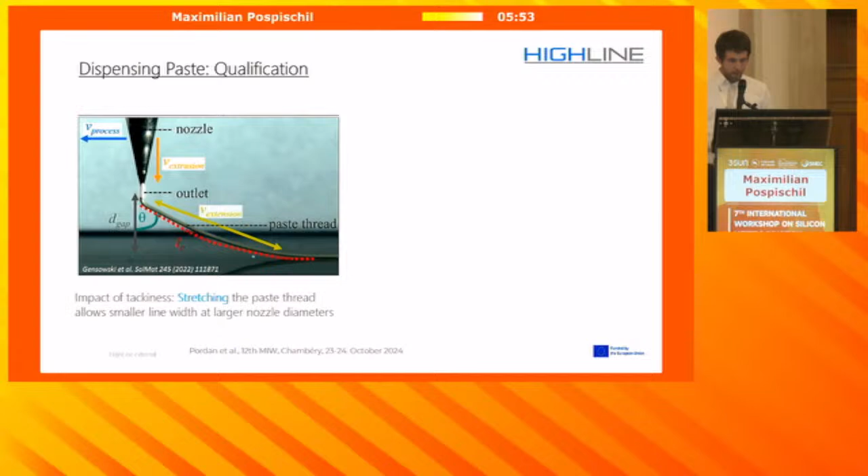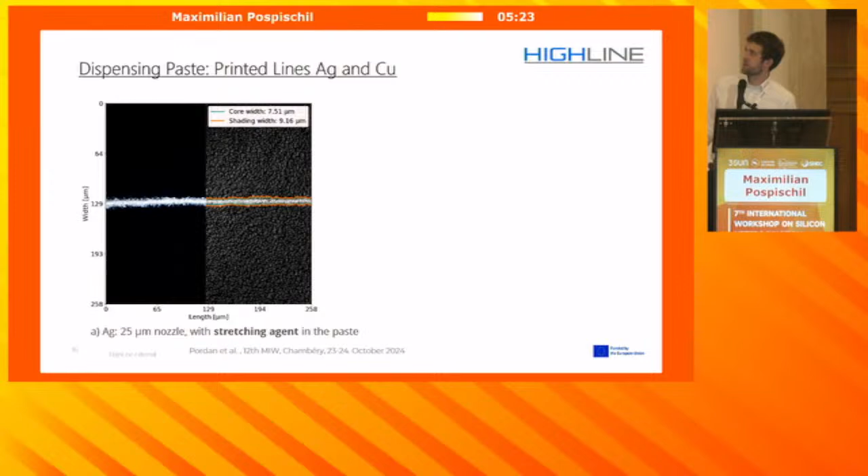The second thing we need to do with the paste is qualify it, so we set up a little filter setup. We make sure there's no buildup of a filter cake, because that ensures a long lifetime of our components. What we achieved here with this feature, you see a 25 micron nozzle, but with some stretching agent added to a silver paste, we end up at like 7.5, or shaded below 10 microns.

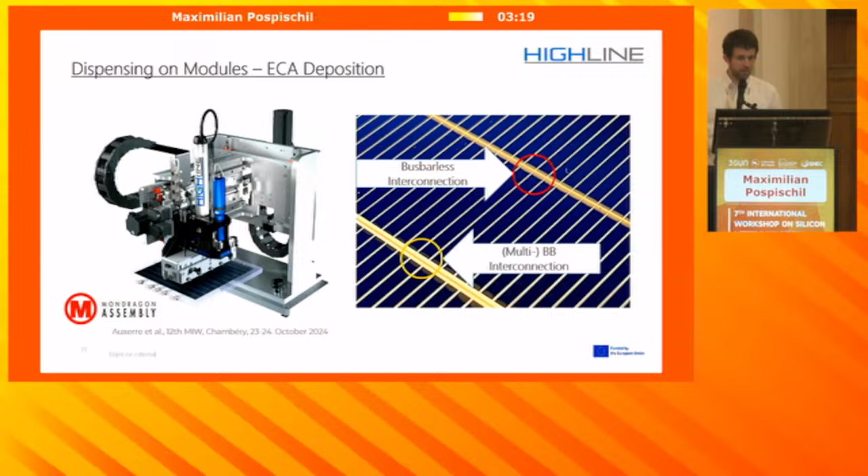Then there's the modules, of course. On the right-hand side there's ECA, and there are several methods how you can apply it - I think here it's done with screen printing, and of course we also do this with dispensing. Here we work together with our partner Mondragon, and we already have a few tools in construction. This is very promising - the results are very promising, and I'm happy next year to have this in the field.

So with this, our portfolio is a little bit more stable, and I'm very happy about this. So summary, maybe the takeaways for today: we have these printheads and nozzle kits in a very reliable state already, and we have the AI controlled process. So with this, we are ready for the market.

Our key features: we have this fine line dispensing down to less than 20 microns, that's the goal. And we have also achieved intermittent coating, which is something very new. And we have a very strong partnership for integration, in cell with Applied Materials and module with Mondragon. I'm very happy about this.

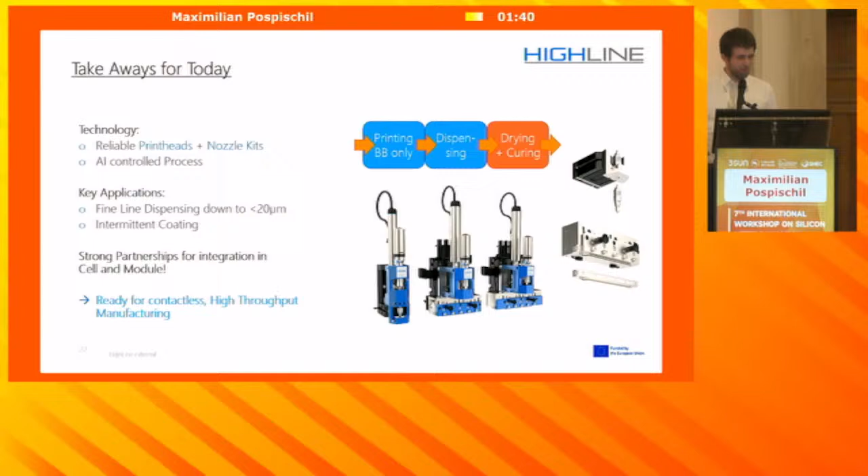Working together with these professional companies that are long years in the market, and they know how it works in the industry, because that's something you learn as a startup, and sometimes you learn it the hard way. So we're ready for contactless high throughput manufacturing. And yeah, thank you for having the possibility to talk here. Thank you for your attention.